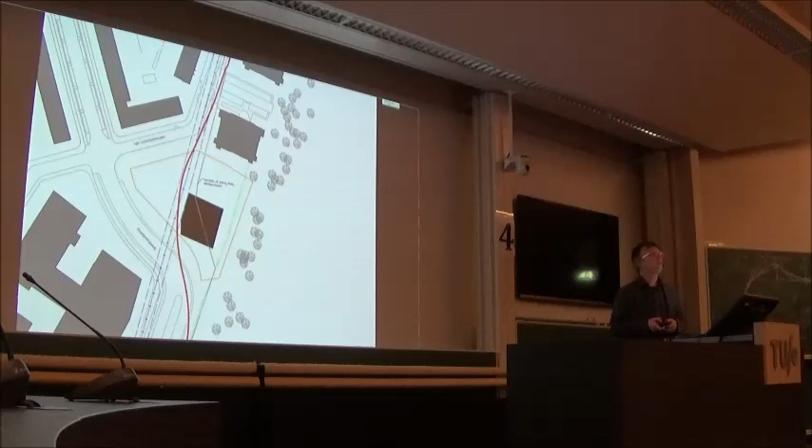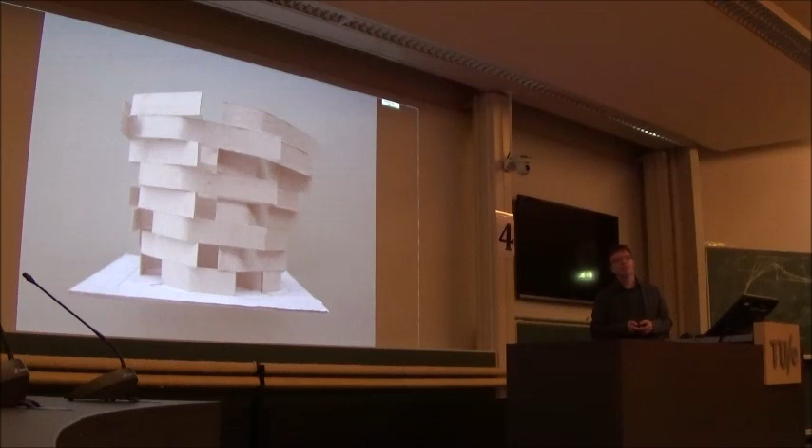Our first design was a kind of tornado, a really nice design. And that design lasted till 2008, till the crisis. Our client sold the land to the building society, and the building society wasn't allowed to make expensive houses anymore. So we had to redesign this and make a brick building. Brick was, after 2008, the favorable material for every developer.

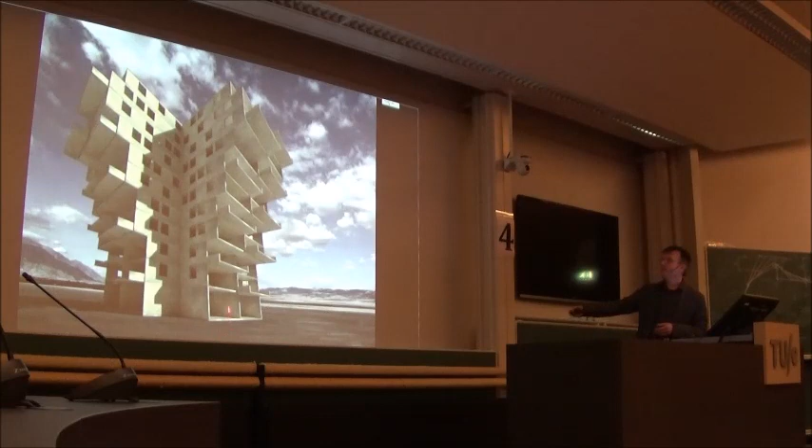So we designed the building with a tunneling system, a tower with a tunneling system, which goes out the further you go up. And this is the final building.

Two weeks ago they started on the site. That's 12 years after we got our first commission. And next week, on Tuesday, we should have had our first meeting with the contractor. So it takes a long time.

If you look at the work of an architect, you find that an architect is not an inventor, but more or less a collector. An architect collects techniques and materials from the building industry. And if he doesn't follow the way the building industry works, the building becomes very expensive.

So complexity is an issue. They don't want that. In 2006, I joined a symposium here at the Technical University of Eindhoven. And at that time I told my audience that maybe in the future we're going to print buildings. And if you print buildings, the architecture and the way architects work will change dramatically.

For printing, complexity is not an issue. The only thing a printer wants to know is: do I have to put a dot here, or don't I? When I gave this lecture, most of the people were laughing. And at the end of the lecture, most of them came to me and said that is not going to happen in 100 years.

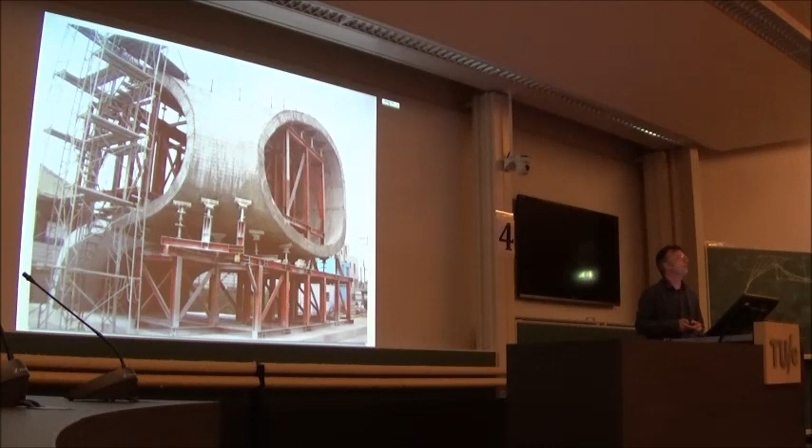This is impossible to do with the rectangular house of the building industry. It will cost you a fortune. And this building site is a contractor's nightmare. You don't want it.

So it is very important, if you want to use a 3D printer, to also change the architecture, otherwise it's useless.

My contract finished in 2010, and at that time I went back to the office as a full-time architect. I thought, okay, I'm going to use the stuff I learned from 3D printing. We were really eager to do that, and we had a 3D printer at the office.

But after a few weeks, I realized it would take a long time before we could implement that.

Like I said, the first thing you're probably going to create is the concrete. You can have free-forming concrete, but then you have to plaster your insulation on top, which are just rectangular panels, and you need to sheet the back with rectangular panels too. So that doesn't work.

So we looked for another system, another technique we could use. We don't have the biggest printer like a foam cutter—we have a very small one.

We found that the best technique is cutting foam with a hot wire, a computer-guided hot wire. You can make almost any foam shape, using the foam as a primary building material.

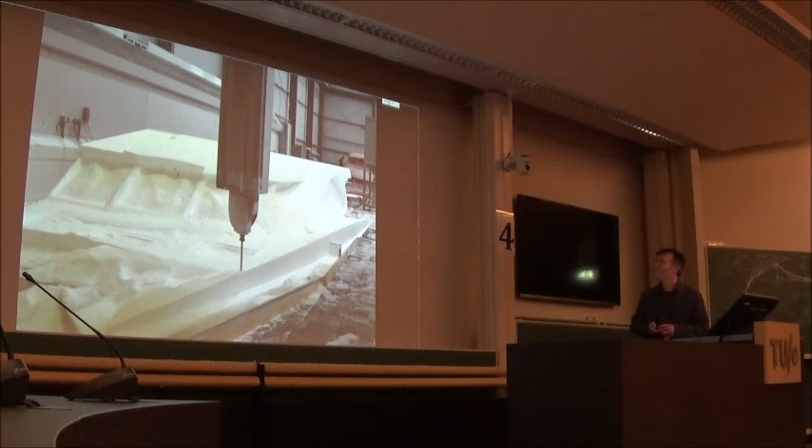We built this type of hot wire cutter—a very small one—at the office to make models, just to see how you can manipulate your elements to build something.

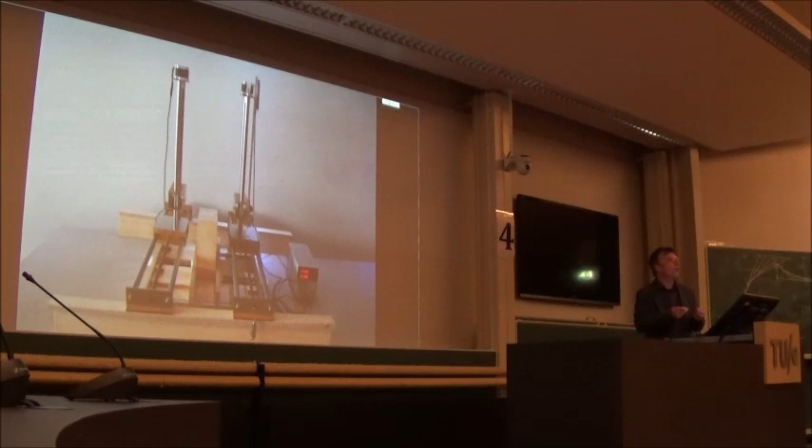Later, they already have bigger machines in the industry, but later you can work with that. You first have to understand how the system works.

So we started cutting, and the first thing we cut was the dome. This one is cut in two directions—cut one way, then cut the opposite way. If you glue them together, you get a dome shape like this.

And we were really pleased—it actually looked very good.

But when I saw the amount of garbage we had from this cutting system, I was shocked. We actually only used 15 to 10% of the block, and we weren't really producing our product, we were producing rubbish.

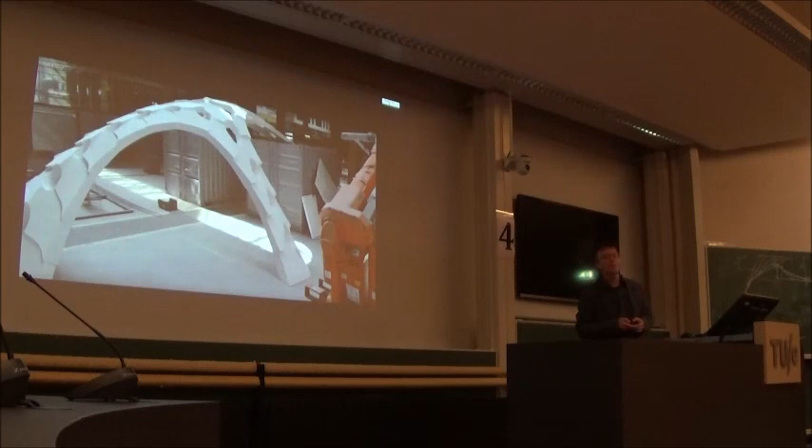That's exactly what the studio Hyperbody in Delft experienced when they cut this one—this is only half the garbage they got out of it. So if you want a sustainable technique for the future, you can't have 85-90% garbage. You need a system where you can actually profitably cut without waste.

So we looked for a project where we could use this. The second thing we did at that time was look for competitions, because when we enter competitions and win, we can actually build something. And that's the best thing—you need to build something to show that it is possible.

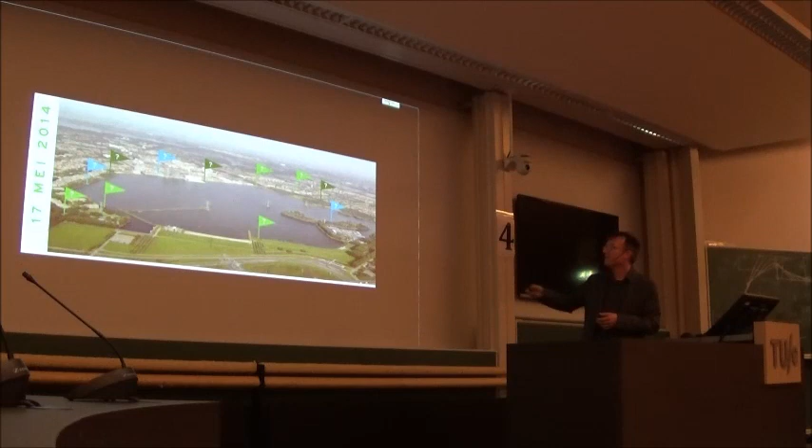We designed this chapel with foam and wooden scales which could be nested. To do that, you need an unrolled surface—it has to be a perfect single curved surface, otherwise you can't put the wood on top of it. Now this was the church. We won that competition, or we were one of the winners.

And after 2 years, next Friday is the first meeting we're going to have about what they're going to build, or what they're going to do with it. I don't know yet.

This is the nesting of the elements. But if you look at the nesting, it's not perfect—you need to cut it several times to get your block, which makes it very imprecise.

So the next thing we wanted was a technique where we could cut without any waste, only cutting once. I remembered that when I was young, we had a box where you could stack boxes on top of each other. The funny thing is, if you cut the inside of box number 10, you also cut the outside of box number 9—which means you only need half your cutting length. That saves a huge amount of time, and you also don't have any waste.

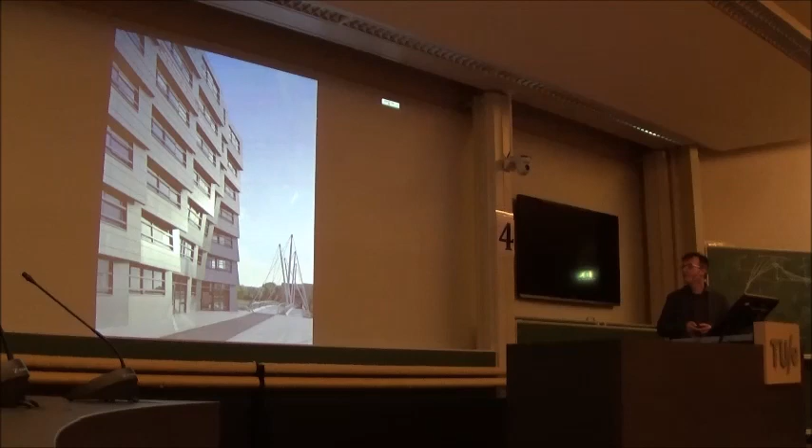When I asked René what was the idea of the bridge, he said, I want to have a bridge which is neutral, which doesn't favor one side above the other. We designed that building, Claus en Kaan designed that building, but we're not allowed to have a bridge like the Erasmus Bridge, where you have one-sided column and a fishing line pulling it to the other side.

The only problem with the bridge is, you always design a bridge which is not between 1 and 3 hertz, because when an army walks over it, it will vibrate, and that's not allowed. Our bridge was on 2, which meant it was right at that spot. So we made an additional stress structure under it, to squeeze up the frequency to 5, and then it was okay.

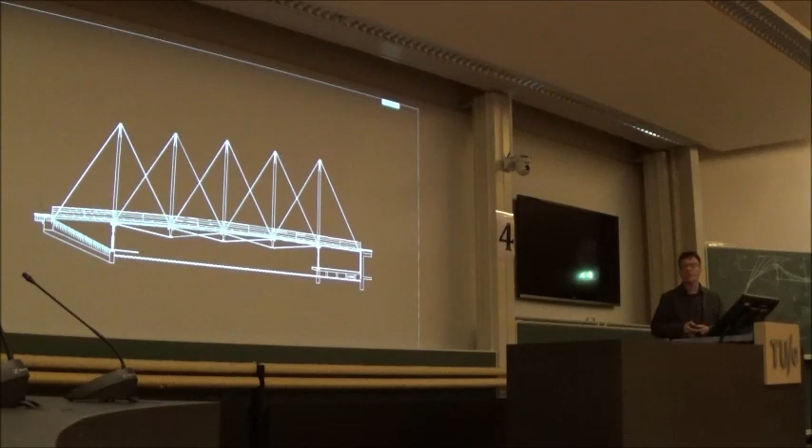The city of Almere, the bridge is next to a harbor. The city of Almere wanted to have a marina there.

Recently, I saw our bridge from 2002, and recently I saw the bridge in Brisbane, and I'm really glad they used that same system.

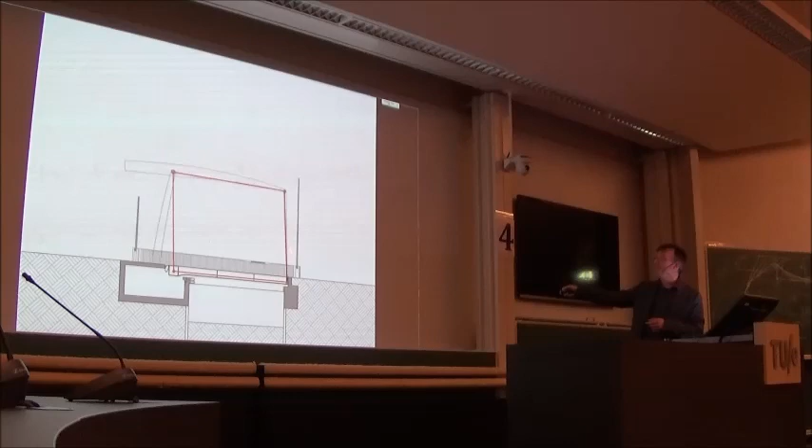The ambition document told us that we had to make a drawbridge, which is actually a traditional Dutch bridge. But if you look at the bridges, they more or less all look the same, so we didn't like it that much. If you look at the structure and technique of that bridge, it works very well because everything is parallel, and if you open it, all those lines stay parallel.

And that means it is in perfect balance. You need perfect balance because you have an engine there with a rack, and the rack can't have that much tension on it. So it has to be in balance because the forces are very small. That's how they did it 30, 40 years ago, and they still do it that way. But you don't have to do it that way.

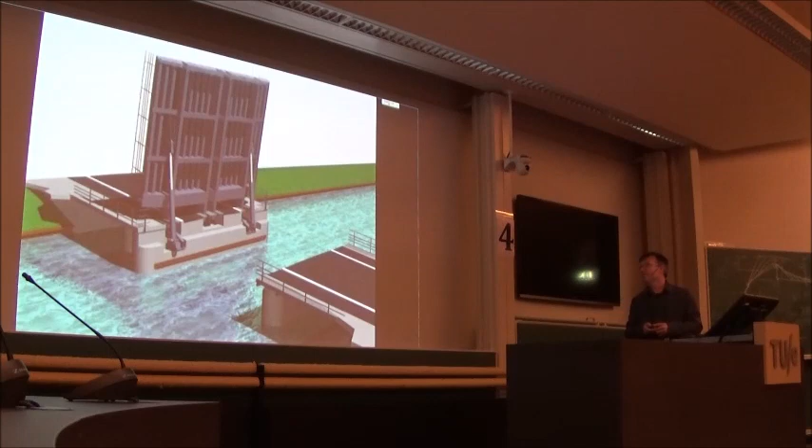Most bridges are now controlled by hydraulic cylinders, which means you can push them up. The nice thing about cylinders is that you can make them any size you want, so the force is not an issue anymore.

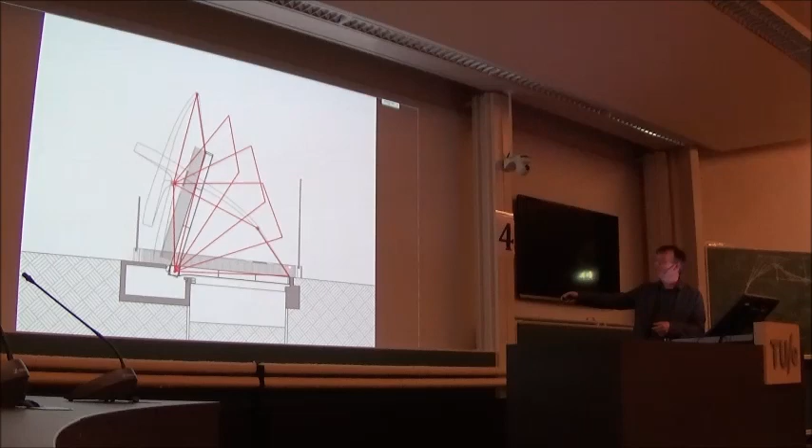So we designed a bridge where it isn't parallel, but where it is a trapezium. If it goes up, the lines don't stay parallel, but they are parallel in the end. That means you have balance in the end, but not in the beginning. But if you realize that a traditional bridge needs a weight to keep it down, then it's even easier to make it this way.

So we made a bridge with an asymmetrical, trapezium form in it. This is the model we gave, actually our plan mirrored, so we made half the bridge, and with the mirror we had a whole bridge.

And they're also building in two halves. At the moment they're building them. This is, by the way, the Weyer Street. We have two bridges, but we want to make it a little bit different. We have a lot of space in this location, so we put the harmonica, as it's called in Dutch, to the outside on one bridge, and the harmonica to the inside on the other bridge. And this is the steel work they're working on.

And this is half the bridge. That bridge was so big that the steel company could hardly make it in its own workshop. That was not the biggest problem though. The biggest problem was finding the road to the building site. How do you get that big element to the water? This is how they put it in.

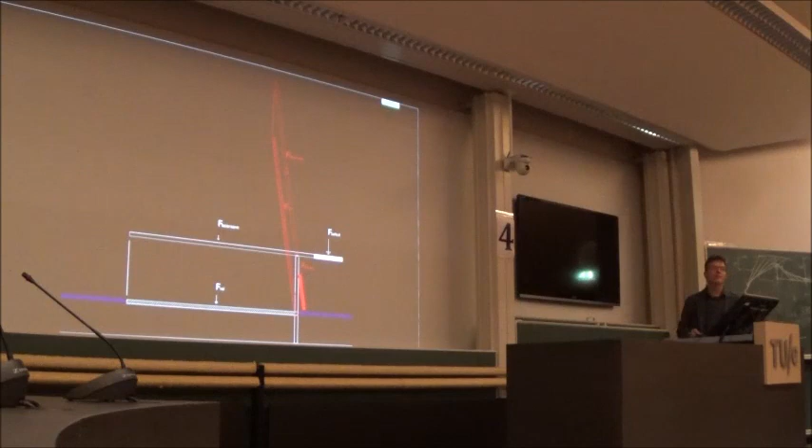If we look at all the urban plans of the urban designers, it's a drawbridge. And if you look at the drawbridge, that span is 50 meters, and the arm is also 50 meters, and you realize that this log is going to be really heavy, and you need a huge weight to compensate that. So that was not a good choice.

So we decided to make it a bascule bridge. We had a span of 50 meters. If you have a bascule bridge, your arm is about a quarter, which means that's 12.5 meters. But that bridge was only 5 meters above the water, which means the weight would drop into the water, which was not acceptable for anybody.

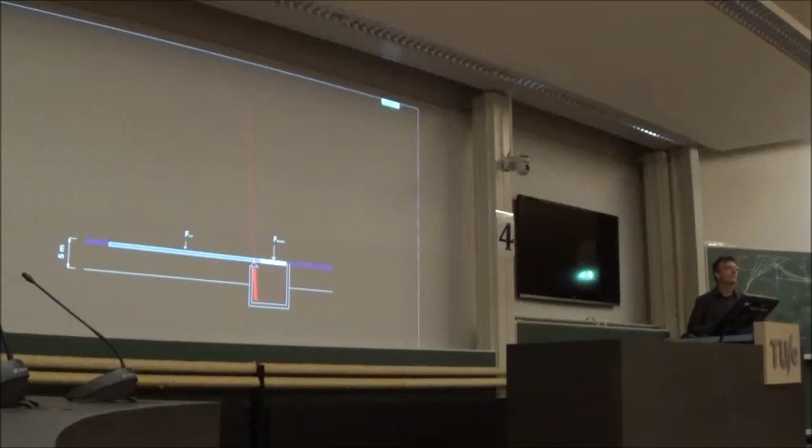So you can make a saddle, but a saddle is a very expensive and heavy element, and we really didn't want to have a huge concrete block in the middle of the water. So we decided to make a small arm. We calculated this bridge and found out that if you make your ballast like this, you need a counterweight of 1,200 tons. But we didn't have enough space to make 1,200 tons, so that wasn't possible.

So we decided to make the bridge in the form of a mast. Our ballast is in a mast. When it goes up, the ballast stays straight, so the bridge goes up and your ballast actually goes with your bridge. And we needed a kink, because otherwise the ballast mast would go through the axis.

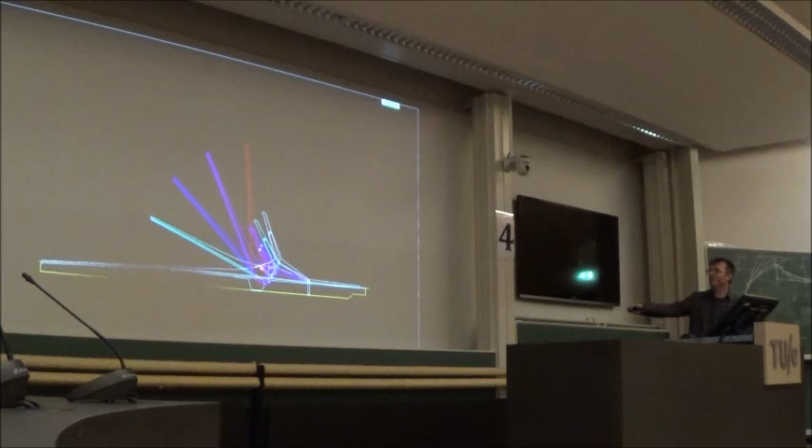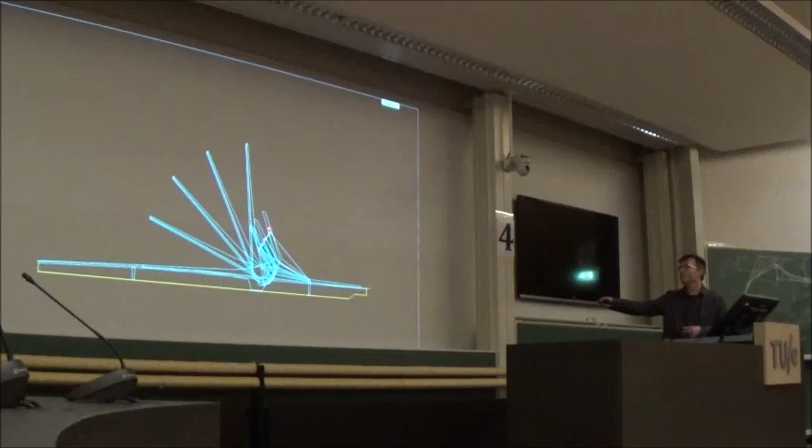This is the bridge we designed. It has four hinges, four axes, instead of one axis with a normal bridge. It has 2 fixed axes, that one and that one, and 2 flexible axes. They will move down, and if you look at the directions, you see this is a curve this way, that's a curve that way. That means again we have a bridge which doesn't run parallel, so actually what the bridge does is flip down.

We couldn't get the weight, we went down from 1,200 tons to 600 tons. And it's 30 meters high. And we were a little bit anxious, because if it flips at 30 meters high, 600 tons, that would be really difficult to control.

But when we drew in the axle, with the arm on the axle and the hydraulic cylinder, we found out that when the bridge is pulling down maximum, the arm is also at a maximum. So in the end, actually the bridge moves smoother than it would do without a moving ballast.

This is the bridge we designed. We designed it like a Swiss Army knife. You can fold it and fold it out, and it fits. And this is the final bridge.

And to conclude, I want to show you a little movie. It's only 1 minute, so you can see the movement of the bridge, because it's kind of a ballet.

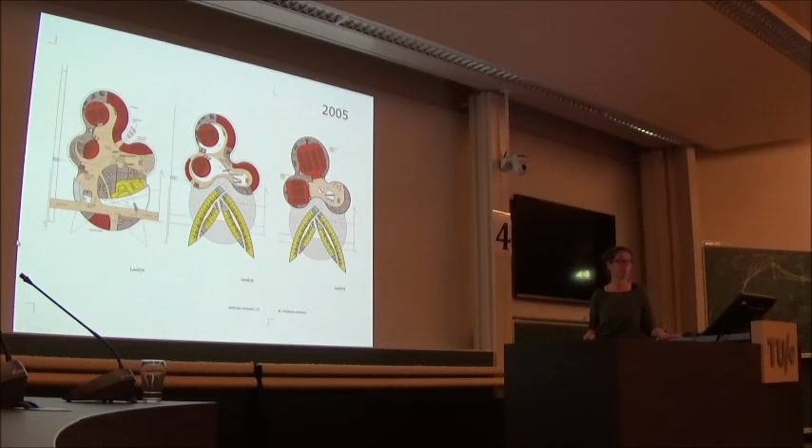There were no more developments in this sector for years, but then in 2005 Schiphol took over, and it became not a Hilton project anymore but a Schiphol project as developer. Of course Hilton still operated it. We made it 100,000 square meters because it became twice as big, also with a huge conference area in the back.

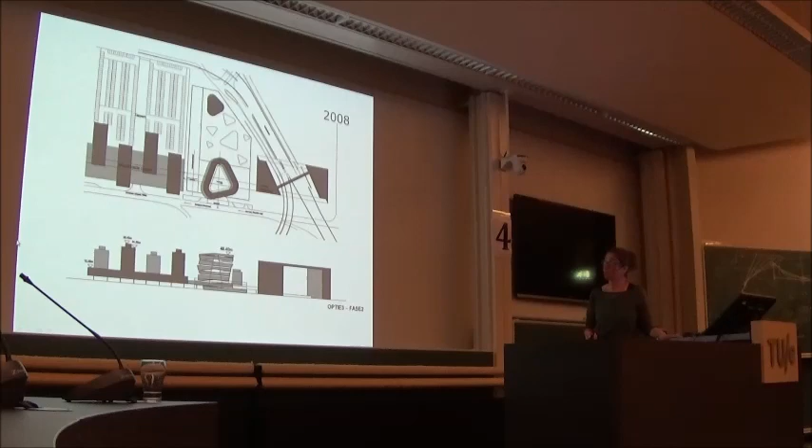Then in 2008 there was another crisis, the financial crisis, so again the project stopped. But you can see here the first atrium models coming up. Hilton in the beginning didn't want an atrium model, but later they changed their minds, and especially on this side it became a really nice internal atmosphere. I will show you later.

Then in 2010 the project as it is now really started. As you can see here, the existing Hilton is gone in our designs. It should stay there until the opening because of commercial reasons - they don't want to take the name out of here, let's say.

So it's, I don't know what I'm doing, but I'm making noise anyway. If it becomes too irritating, tell me.

We designed the hotel in this sort of tower, and in the low part was the conference center. We designed it really in the corner of this elevated highway. We turned it a little bit so it became a new direction, also toward Evert van de Beekstraat, where there's a lot of new developments from Schiphol. By turning it, with the edges a little bit roundish, it became very much important for Schiphol - it became a landmark.

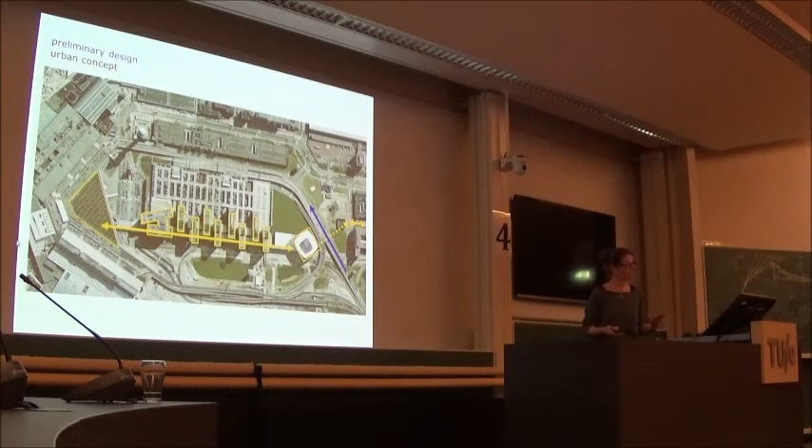It's in this main entrance route towards Plaza. So we kept the facade in the same colors as the rest of Schiphol, which is white, grey, sometimes a little bit black. We made it very special in shape and in facade, I will tell you about it, but in colors we kept the same tones.

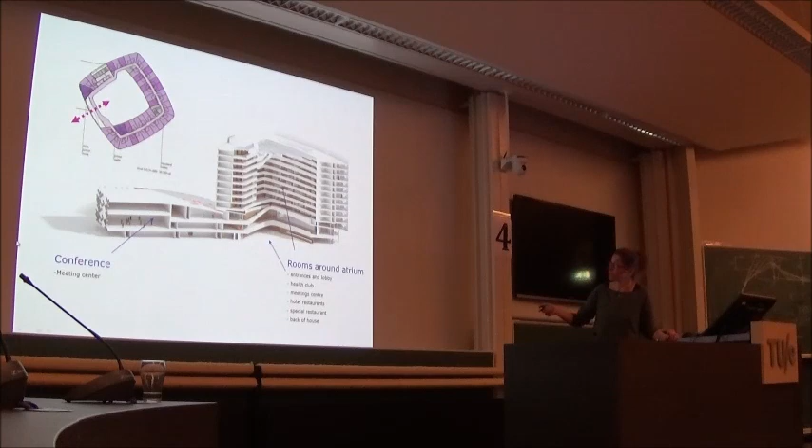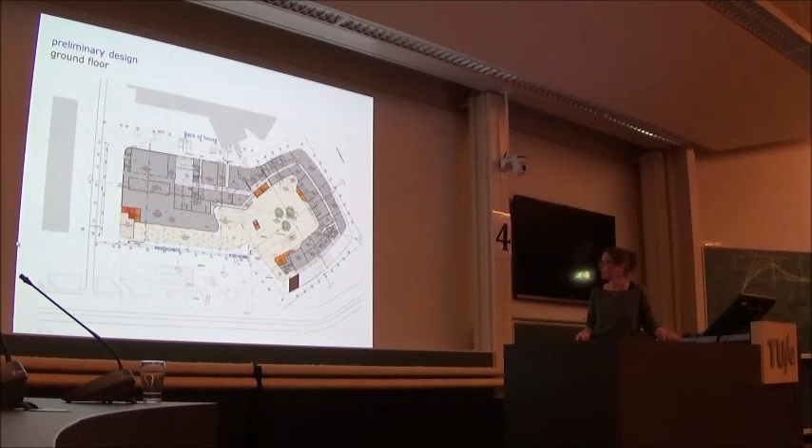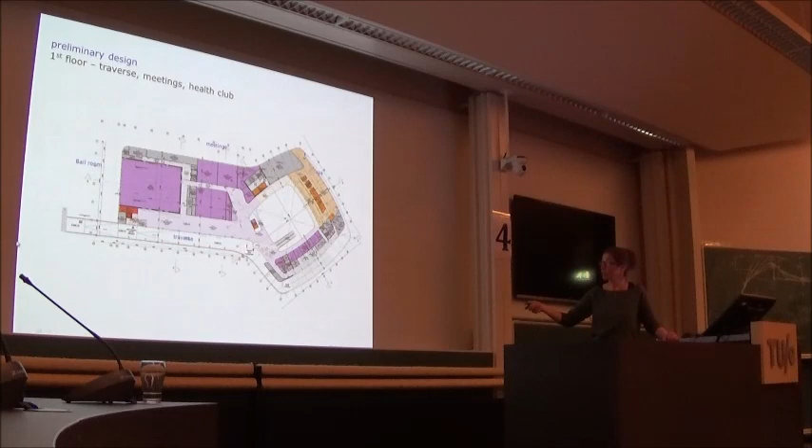So this is sort of the beginning of a new introduction on this side, where all the offices have more functions in the plinth. On the first floor, all the purple areas are meeting rooms, and this is the spa. This is the level where you can actually come from the airport, from your airplane, indoors, all the way with this traverse into the lobby of the hotel, so you don't need to go outside.

Executive floors with executive lounge. When I was preparing this lecture, I was thinking what is very important about this project - having a lot of patience, but also communication. This is a building with roundish shapes, as René was also telling me in the beginning of this lecture, and it has this section through here which together with roundish shapes is quite complicated to draw, and of course to build.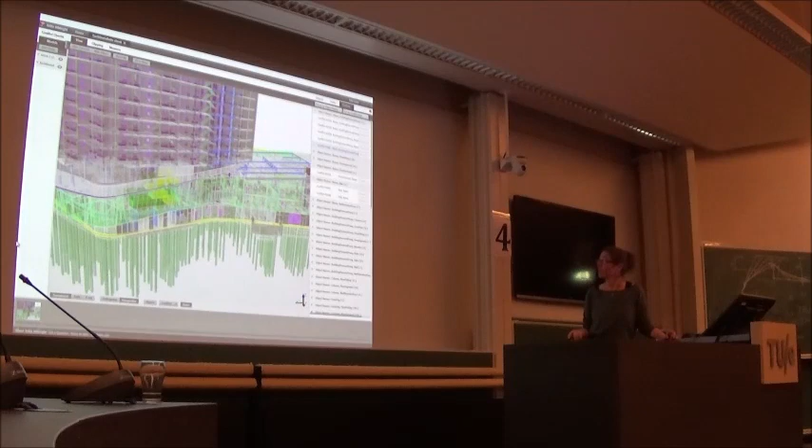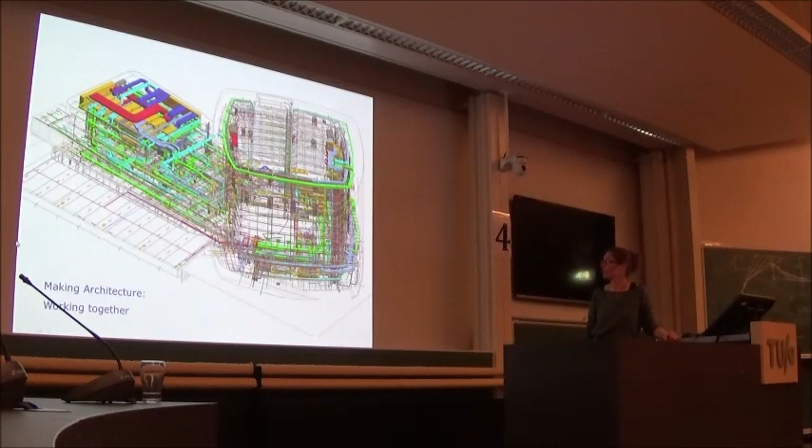Yeah, this is a way of making architecture in a very technical way. In the beginning we had 1,000 clashes because everything was not really fitting, but now of course in the end everything was solved, and it's very nice that we could actually have this clash control as a model.

And then about the skin. The shape of the building is of course roundish, a little bit dynamic in this corner of the highway, and how to get from the idea, something with a snake skin, diagonal lines, to a serious facade, which also has no rain inside, no sound inside. In Schiphol we have a big problem with sound, of course, and all those matters came from these first ideas.

And this is actually the first render we did. It's not a render, by the way, it's a Photoshop, so it's just an idea, a first idea into realization.

We started from this idea of layering the facade. The first layer we designed was, of course, the windows of each room. Each room needed to have 2 or 3 diamond-shaped glass windows. Then on top of that, we had a sandwich panel, a composite panel with a dark color, the color of the glass, so you would never see this regular pattern anymore. You would combine it with the darker panels and then it becomes another pattern. And the last layer is the layer of lines and white panels on top of it.

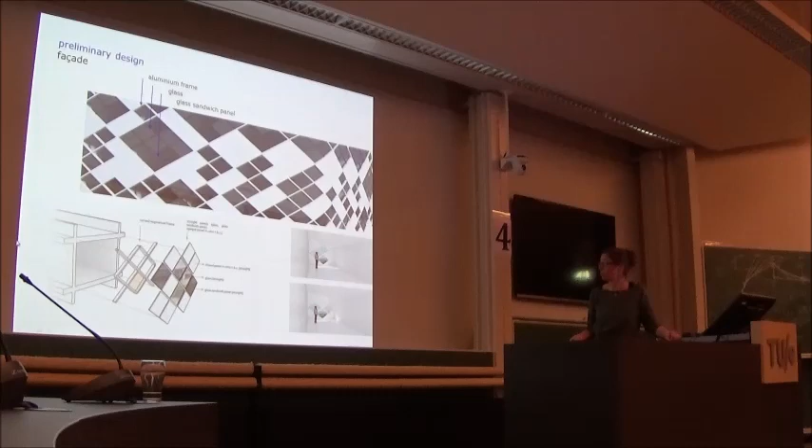And then, of course, once you start drawing it, we did tender this in a separate tender. So we had a tender for the building and a separate tender for the facade. We worked closely together with the supplier of the facade.

And there, of course, we did a lot of testing, not only technical testing, but of course also the aesthetic testing. So here you can see that some of these seams were not the way we would like to see them, so we kept testing over and over again - testing the colors - and slowly we got into realization.

And here you can see the difference between the inner facade element and, of course, the outside cladding, which gives a totally different look to the building. Here you can see perfectly each room with its own windows, let's say.

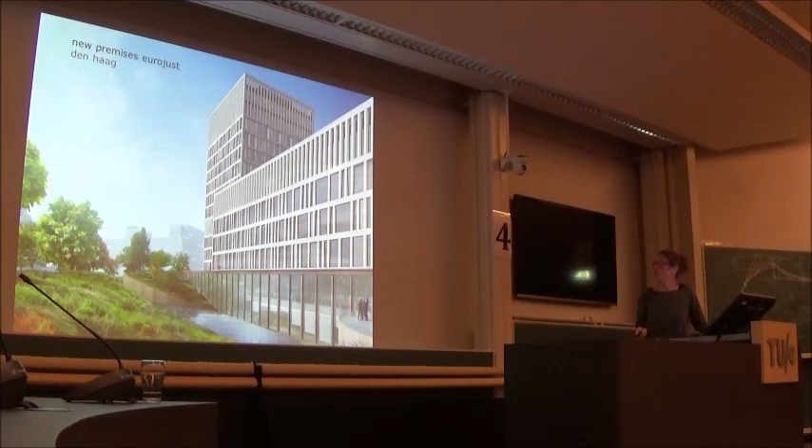This was a competition picture, and once we got to really go, this is the model we made in competition, and it was in 2012, and the funny thing is now this building is exactly the same as we proposed 4 years ago, and what you actually do all those 4 years long is proving that it actually works. So it's not designing actually anymore, it's proving that it works all the time.

So also about the facade. We said in the beginning what would be nice to have those facade elements a little bit tilted or leaning backwards, or also in a horizontal way. And you can see that very much, very good here. And it reflects the light in a different way.

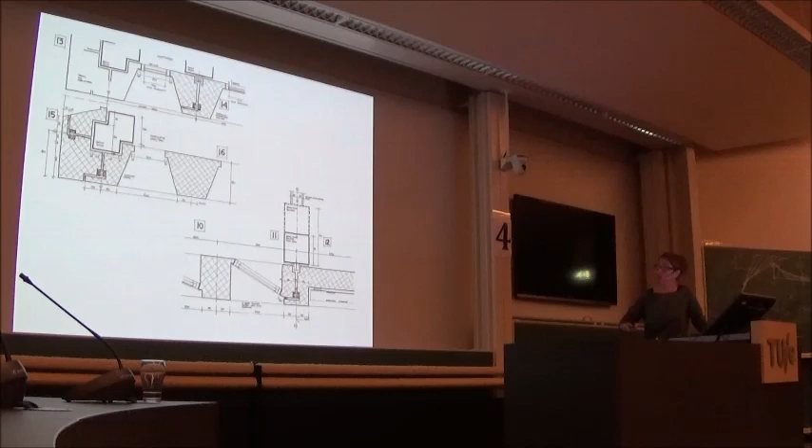We thought that it would be a good idea to have those elements in one element, so slightly different than we did it in Hilton. So we put it out on the market, and then the market said, no, we do it again as Hilton. So we again make an inner facade element, and we put the composite on top of that. So they did it, detailing it in a totally different way. Yeah, and of course the detailing, the aesthetics and the performance of the facade should stay the same.

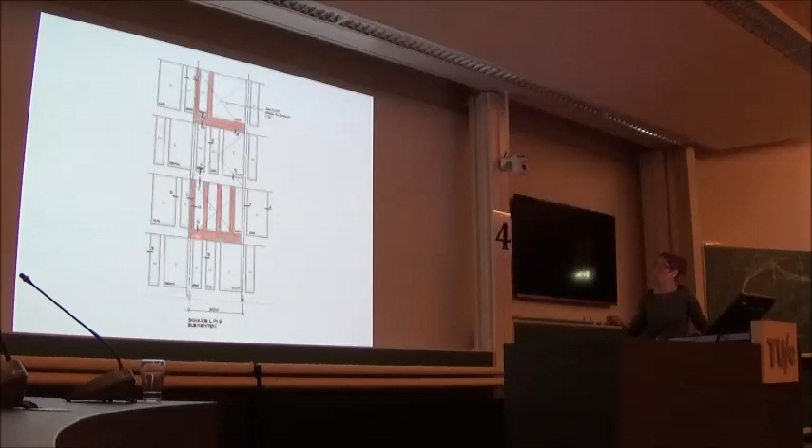So for instance, this is a drawing we made about all the seams, where they should go and where they shouldn't go. And this is exactly how they made it in the end. They just did it in a different way.

So we did a lot of mock-ups, of course, to test it in reality. And what is really beautiful here is that this composite material is perfectly smooth, where in Hilton you can still see that it's sort of handmade work. So it's improving also in the industry.

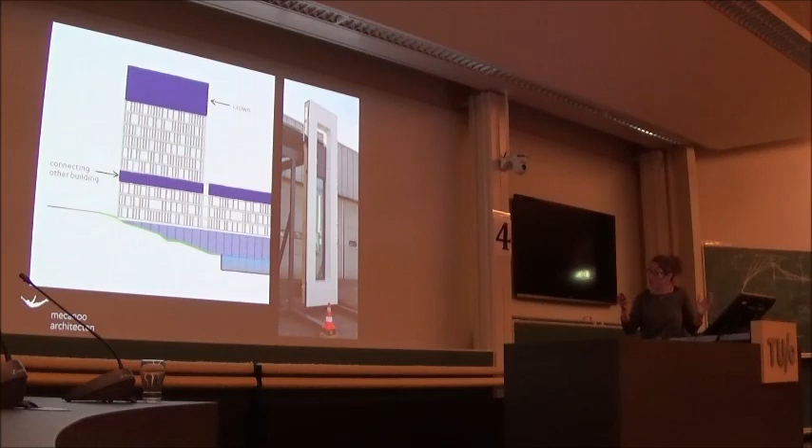Yeah, this is how it looks like now, Eurojust. So it will be finished in December. These pictures are made last Monday.

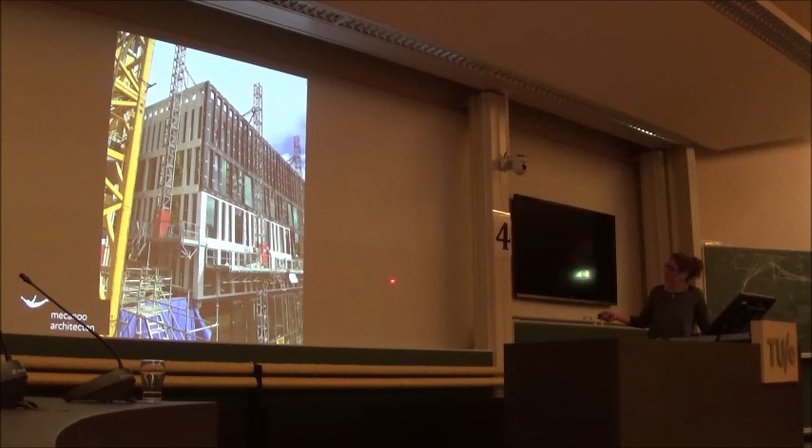To be honest, we have to keep on talking, because what happens on this facade is - I can tell you now - the whole outside facade, the white part, is shifted 11 millimeters from the black part. So the difference between what we designed and what it should be is, at some points, more than 2 centimeters, so you could actually see it. What needs to be done is that all this facade, which was mounted till here, has to come off, because everything is connected to each other. We have big discussions about that today, but that's what making architecture is also about - having discussions.

Then the medical center in Zaandam. And again, a competition. I think René mentioned the word competition a lot - well, I do the same. Making architecture is also about a lot of competitions.

This is in Zaandam. When we started, we said okay, the most important thing in a hospital is to design for patients, but also for employees, and very important for the whole city and everybody living there. I have to apologize because this part of the lecture - I will keep talking in English, but a lot of words are in Dutch, sorry for that.

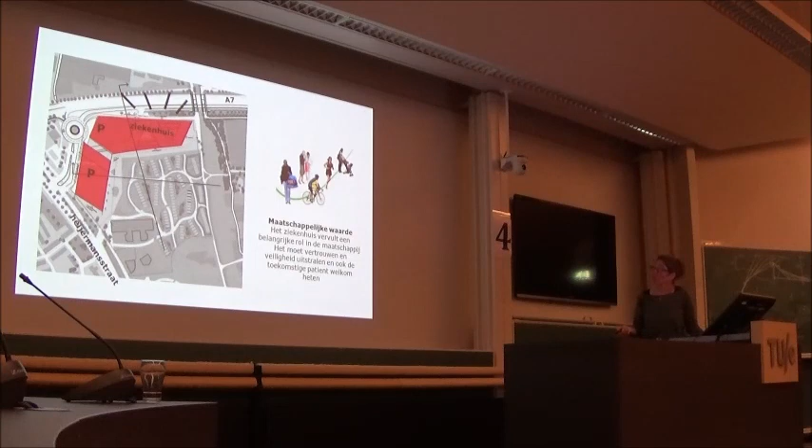The urban plan we received, where we started off, was to have a hospital on this side. This is the A7, a highway - people drive here at 100, slowing down a little to 80. But the hospital was next to the highway, and then you have 2 parking buildings close to where people actually live. So we said, if you want to design a hospital for your city, you should at least switch it, turn it around. That was easier said than done, but in the end we managed to do so, to have the parking buildings on the side of the highway and have the hospital in a different shape, more welcoming and opening up towards the city and city center.

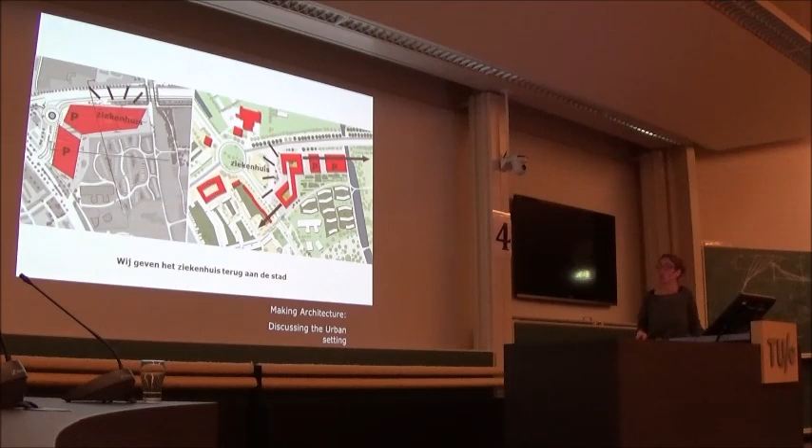So discussing the urban setting is always very important - that's where it all starts, how the connection with the city is. It's an open square, there's only one way of looking at the building, finding your entrance - very clear. Finding your orientation, keeping your orientation is very important in a hospital, when normally you're not the happiest person when you have to go there. Stress is something that doesn't help your orientation, so therefore it should be as simple as possible.

Soeters designed the City Hall in Zaandam, and he was inspired by the Zaanse huisjes. So we found our inspiration in the industrial heritage of Zaandam - we made a brick building with a white volume on top. I never showed this before, but I thought now it's about making architecture. This is the sketch, and I know I never showed it before - it's a very ugly sketch. But the funny thing is, it's actually totally what is in the end being realized. At least I can see that in my own sketch.

You can see here 3 layers, because these little things are floors - 3 layers of brick building, and this part has a balcony, for the people who stay in this high part, and this is a bit white, the blue sky, can you see? Well, the funny part is, 3 years later it is how we designed it in the beginning. Of course it all starts again with finding the right brick, and this is a beautiful brick - it's Voltasan brick, and because it's very expensive we have to turn it on its side, so you need at least less bricks.

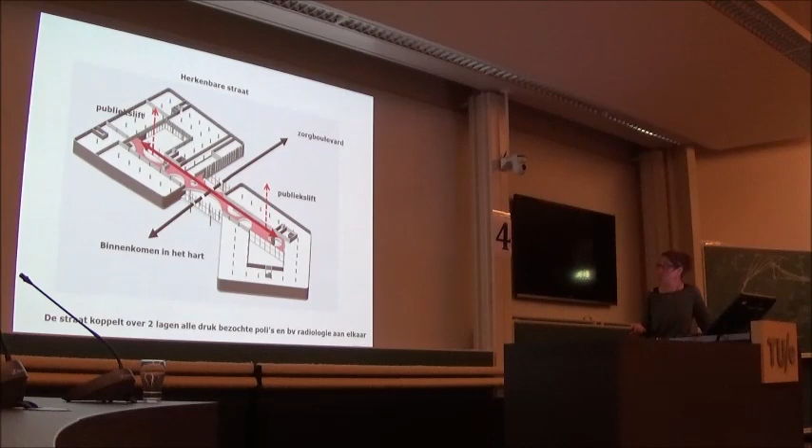This is our competition image of this street, and the materialization all got sort of the same routes. It only was shrunk a little bit because this is quite a big entrance hall for a still not-so-big hospital. So it was actually a good thing to do, and of course it saved money.

Again, here the two elevators. This is the public elevators, and next to it we have the other elevators, so it's all very compact in size. So the orientation is an important thing. Shape, the two patios, and the street also is there to show different centers. It's sort of little hospitals within the hospital, and they can present themselves next to the street.

They're still renders, and on the street we make this graphics, so it's 90 meters long, two layers high. We make graphics all along, and in the end I think it becomes a really special hospital.

This is how it looks now. So the graphics will be as wallpaper on this wall, so the blue will be gone, but the beautiful light from above will stay. You can see the light already coming in a nice way. But that's maybe the easy part, to design this street.

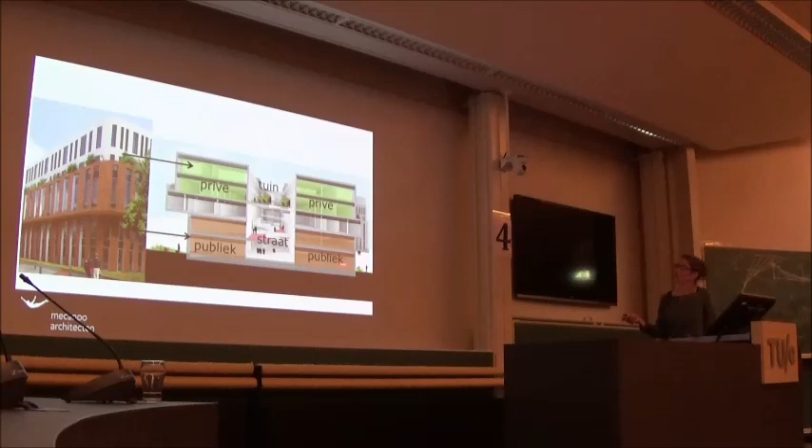So in the competition stage, we said we have public on the ground floor along the street, and in the top floors we have more private, so it's the rooms where patients stay. These are connected to gardens and balconies, and the public part, the polyclinics, is connected to the street.

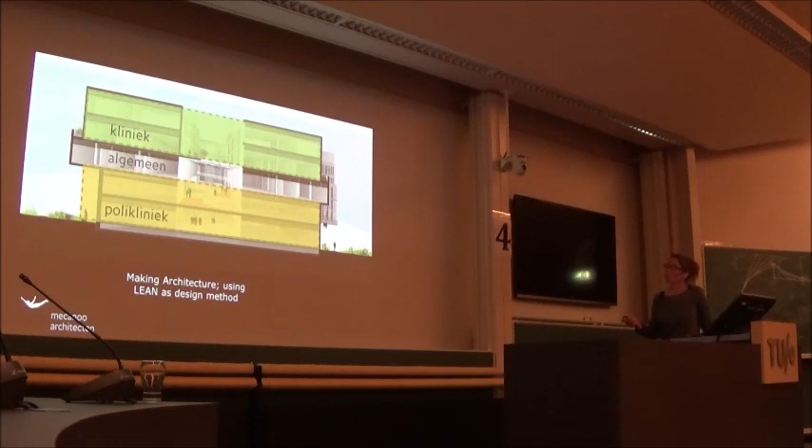If you think in this lean way, using lean as a method, you could say this is a flow of patients. And this is a flow of patients. And if you forget about the building, you have this flow of patients. This is where people stay. This is where people just go for one or two appointments with the doctor, but after that they go home. Then if you add two other flows, defined by the hospital, they define seven important flows.

This is when you have an appointment, and this is when there is an emergency, so you don't have an appointment. And if you look again at this system as a section, here is the polyclinic, this is the clinic where the beds are, this is when you have an appointment, and this is the acute column, and the diagnostic, that's for instance radiology.

And then on top of this patchwork, this is then the ground floor, we put on all the different parts of the brief. So we have the operation complex, we have the cardio center, all these kinds of functions are all put in the right position. This whole process was very interesting, together with all the doctors and nurses, because they had to define where they were in the process.

The next step was, how is this one connected to that one? Should it be close by, or can it be a little bit far away, or is it very important? Each flow of people, or value stream as we call it, had medical staff from 15 doctors, and altogether they had to decide which was the most important connection.

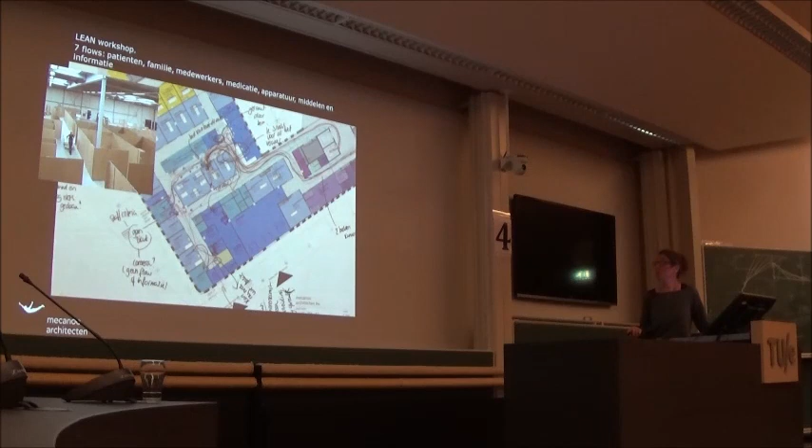Each of these lines represents a flow, whether of family, patients, medication, information, or all kinds of other flows necessary for this process. We mapped this into the drawing. This is a really small part of the building, but we did it for every part of the building. It was a good learning process, and I hope we prevented a lot of mistakes in the building.

For us that's also really about being an architect, testing it yourself, experiencing how it is to be in bed, to look into lights you don't want, or to travel all the way to the operation room while you're nervous for the operation. What do you want to see, what don't you want to see.

The last project is the Sporthogeschool in Eindhoven. It's 16,000 square meters, located in Genneper Parken. This is the render, and this is the building as it is now.

So we're here now, this is the Genneper Parken. Probably you've been there, it's a huge sport area where, if you zoom in, you'll find a lot of sports you can actually do there. In this part is the, well it's not new anymore, it's been there 4 years now, the Sporthogeschool, which translates to a sports university, or sport college, I guess.

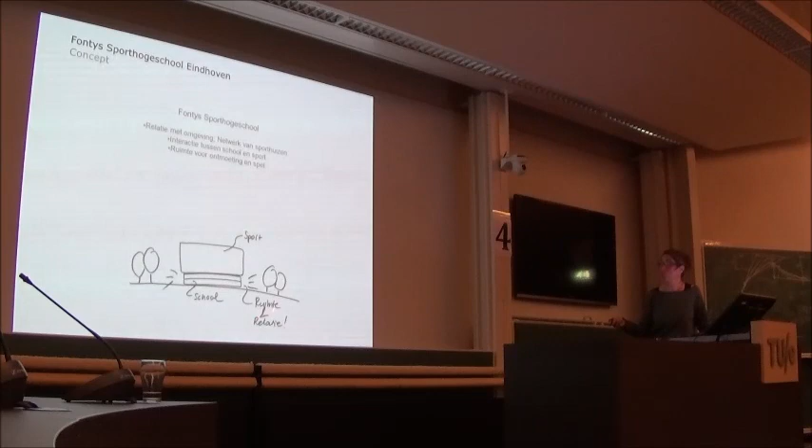Therefore we could make a connection to the outside. So at the same time we asked the Sporthogeschool to make one of their sports facilities an exception to all the other rooms, so we could make one sport hall with light from above. We put it in the center of the building and lowered it from our concept on the first level down to the ground floor again. I'll show you why later.

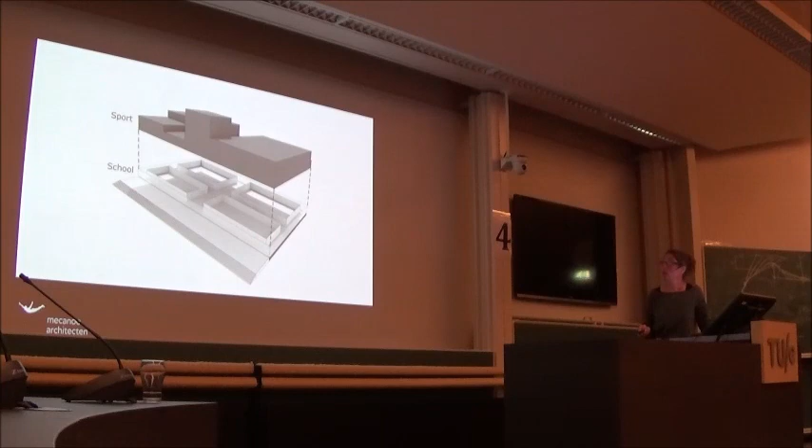Then we had this transparent plinth, and we were lucky we also got to make a climbing wall, which makes a nice tower on top of it. So this was the idea: school in glass on the ground floor, sport on top, and then we start mixing a little bit.

This is the whole building, and then we take off the roofs, and you can see the sport facility here. These are actually three big sport rooms all together. This one has a tribune for 400 people. Here you can see already the skylights for this room, this sport hall in the middle, which we lowered again to the ground floor.

If you talk about going from concept to realization, it's easy to draw it - it's a line, and then the sport is going up. But then if you have to do sport on top, of course you start to play basketball, you have to take a lot of acoustic measurements to actually be able to do so. So it's actually a box-in-box system we had to make here.

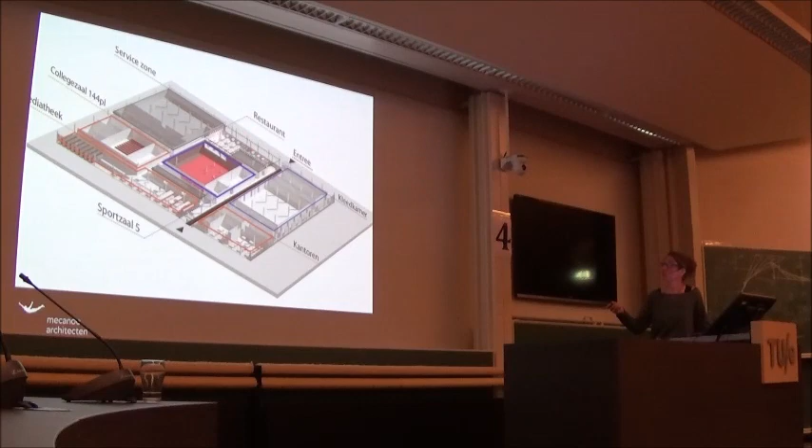Our idea was that on the ground floor there were also changing rooms - how to make it still transparent, because changing rooms are of course without windows. We said we put the changing room slightly in, give it a big bright color, because otherwise glass is not so transparent - it becomes transparent when you put light or a color behind it. This is how we organized the lockers in the walls of the dressing rooms, and from the outside it actually becomes quite transparent.

And then here you can see this huge, big closed box of sports facilities. Making architecture is also about convincing people, because we had a supervisor who said no, it should be white, all the buildings should be white here. We thought, oh my God, how should it be white? We tried to convince them because we wanted this transparent plinth, and it's a lot more contrast when it's in a darker color.

The other reason was, I think I showed more or less three white buildings before - I love white buildings, but in this case it's in a very green environment, and white brick really becomes green very fast. So we said no, it definitely should be a dark building, and he was talking about contrast, so we started taking our panels everywhere to show that even with shadows there's a lot of contrast in the black building too.